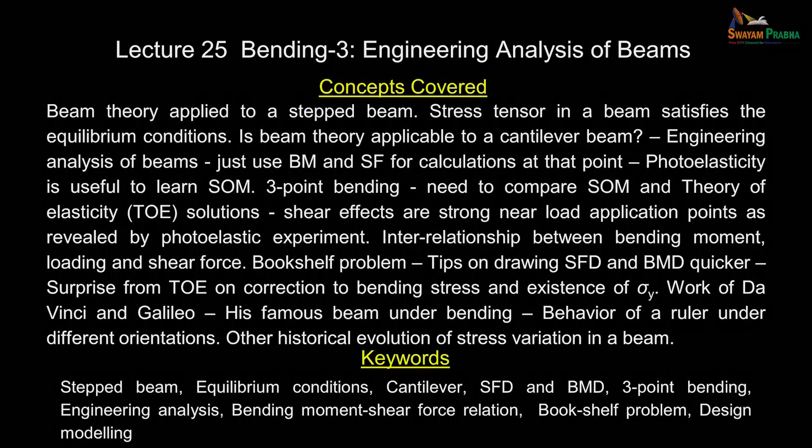Let us continue our discussion on bending of beams. We have developed the basic equations of strain and stress by considering the plane of symmetry. We have got the expression of strain as minus My by EIZZ, and sigma x equal to minus My by IZZ. On the plane of symmetry, we have applied the loading also, and we have got these expressions.

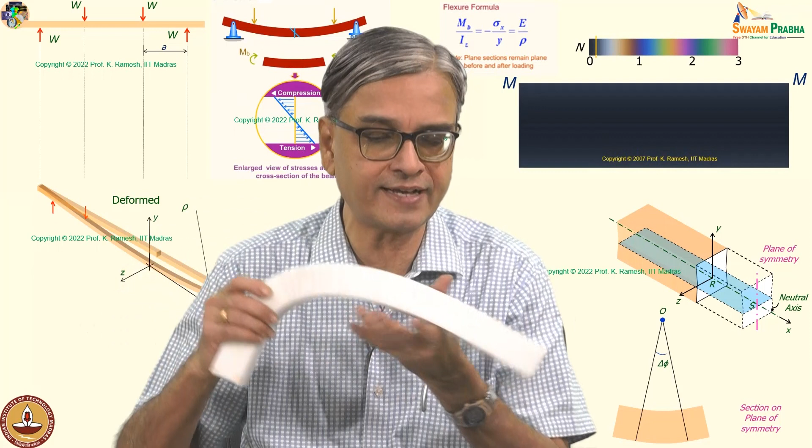We did not stop there. We took a counter example. Suppose I take a beam like this and then have large deformation. When I consider the thickness, what happens to the Poisson ratio effect? So we asked counter questions. When we developed the theory, in order to understand its limitation, we said...

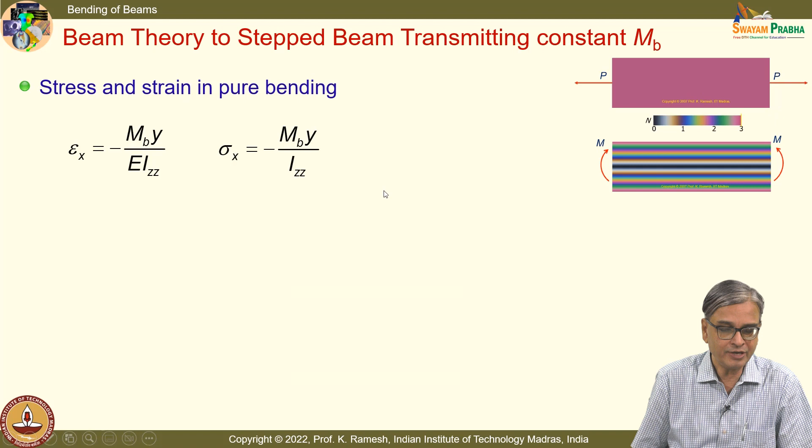Because of Poisson ratio, you have anticlastic curvature. Because we are working in small deformation, these equations are applicable. So we satisfied: the moment I go to large deformation, I should work with deformed configuration. We have not attempted to do that mathematics, but we satisfied when I have small deformation, my equations are reasonably good. And we have also got the flexure formula.

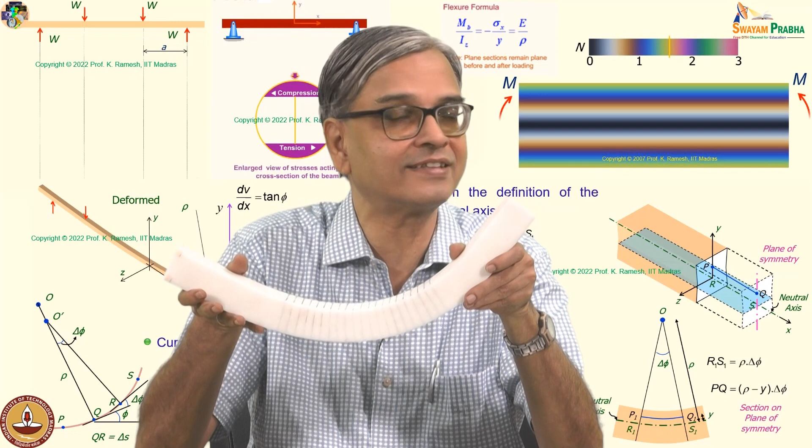I am not sure how many of you recognize: when I apply constant bending moment, the beam bends. These are like arc of a circle. Why? Because the bending moment is constant along the length. The bending moment is related to the curvature. So you have arc of a circle.

And when we looked at a slightly different problem where I have a step, because I said in engineering practice, you need to have a step so that you can locate the bearings. That's a simple modification I have made. But I have not done anything to the loading. The loading is still only pure bending moment. When I have only pure bending moment, I have a very interesting result away from this small zone.

Which is having this step, I find the fringes are horizontal, and I also have the black line forming at the center. If you have actually noticed the animation, you would have seen that black line was initially very broad and it was becoming sharper and sharper as we increase the bending moment. Like what we have seen in a beam of constant cross section subjected to pure bending, you see the same features even in a stepped beam.

And you also have the definition of neutral axis. In the neutral axis, when I have a triangular variation, the stress value is 0. Fine. Photoelasticity plot: sigma 1 minus sigma 2. Both sigma 1 and sigma 2 are 0. And you also have this neutral axis.

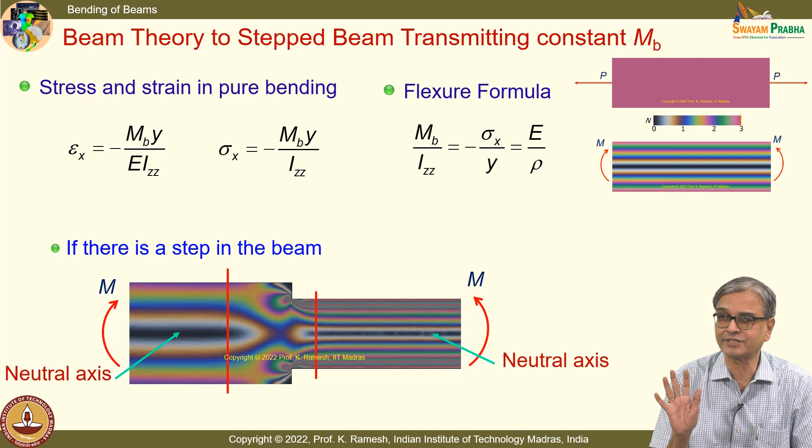And what you do is that in theory of elasticity. Even though I am not going to take theory of elasticity in all its completeness, we just look at what happens to this point A, and from your bending equation that sigma x is given as minus Mzy by IZZ. I said that you should cultivate the habit of looking at the stress component and putting that as a stress tensor. And what we have developed: differential equations defining the equilibrium of the solid.

We have not used it in this course till now. And whole of theory of elasticity utilizes these differential equations, solves this problem as a boundary value problem, and you get the solution which is exact, where you don't make assumptions about the deformation. You evaluate the deformation as part of your solution.

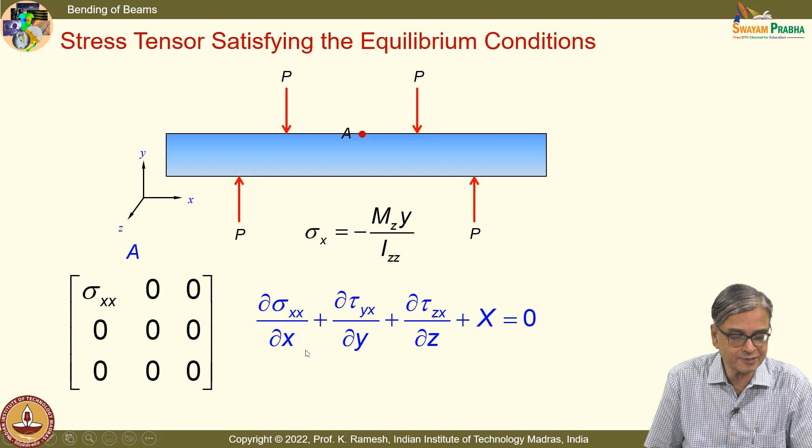And if you look at this, in the absence of body force, we have already said in strength of material that shear stresses do not exist because I apply only a pure bending. I have only sigma xx, and sigma xx is found to be a function of only y. So when I differentiate with respect to x, it goes to 0. It satisfies the equilibrium equation.

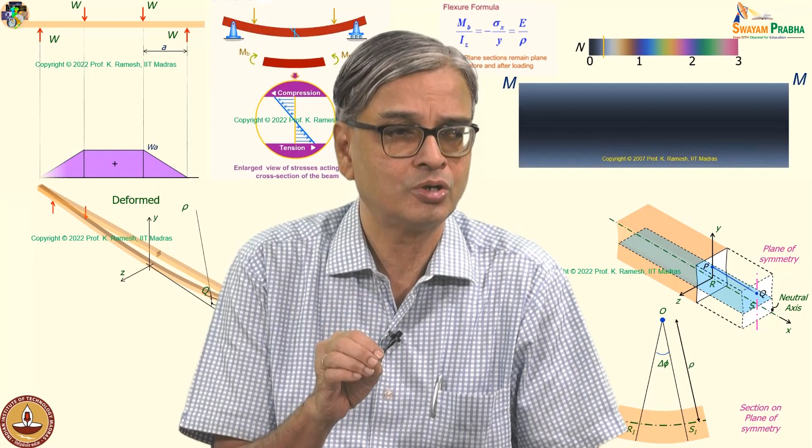Is the idea clear? So any problem that you do, you verify your solution with an experiment, whether it is an experiment based on a bending of a beam like this, or when you look at photoelastic fringes. If the experiments are carefully done, what you get in an experiment is truth. And your theoretical development should conform to that. If it is not conforming, then you must find out what is its limitation, what way we can improve.

So you should always keep track of that. Experiments are truth if they are performed carefully. If you don't do the experiment carefully, then there is no fun.

Now what I do is ask a question: can beam theory be extended to cantilever beam? I make only one small modification. In the earlier problem, we didn't have shear force. In this problem, I take a shear force which is constant on the length of the beam. Because it is constant, I find the bending moment varies along the length of the beam. It does not remain constant, it has a linear variation.

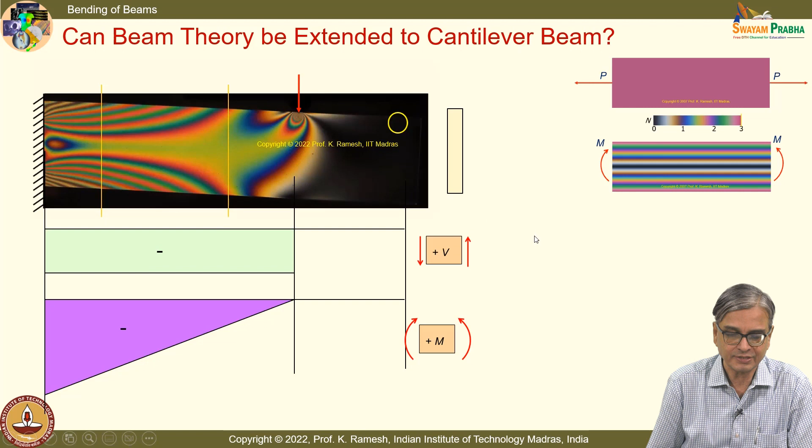Is the idea clear? Are you able to see? Now, what I have here is the bending moment varies linearly along the length of the beam. That means when I go from this point to this point, the bending moment is increasing. Suppose I say I can use the flexure formula, which I have it here, and then I put the bending moment corresponding to what I have in the bending moment diagram and evaluate the stresses.

The bending moment is varying linearly, and when I move along this direction, you would anticipate stresses also increase. If I have stress occurring here, the same value of stress occurs at a lower place because the bending moment is higher. Is the idea clear? That is happening.

The bending moment is varying linearly, but I find that this is not varying linearly, it has a curvature. The observation is correct. But you have one more difference.

I have a bending moment varying along the length of the beam. I also have shear stress. I have a new addition because of the way the beam is loaded. So I have to account for what way this shear stress is going to influence. The shear force is going to cause you shear stress.

And long back we have discussed, you have this as a free surface, this as a free surface. You can find out the distribution of shear stress variation from our strength of materials. Whatever the result I get, because it is a free surface here and free surface here, this should go to 0 at those points. That we have made clear.

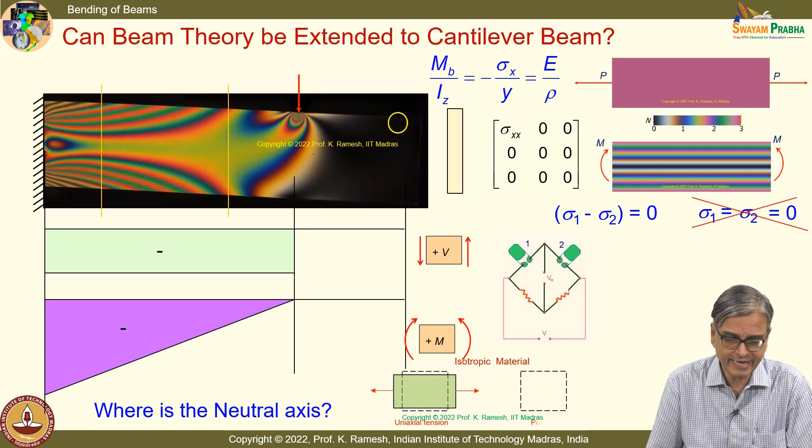So at this stage, what we say is you can extend it to analysis of a cantilever beam. The moment you say it transmits shear, I am going to get shear deformation, which will violate plane sections remain plane before and after loading. So I must call whatever analysis I do as engineering analysis of beams. Your exact analysis stops at pure bending. Anything other than that, even though we exploit those expressions, you need to carefully look at it as engineering analysis.

I was quite happy that you have done a beautiful set of experiments. This is what I said: when you do the experiment carefully, experiment is truth. If you don't do the experiment carefully, experiment is not truth. And in fact, whoever obtained this fringe pattern, I should compliment, because it's very difficult to handle this model in the polariscope and apply load with your hand. And when you do an experiment, you also anticipate results. No one does the experiment blindfolded. Before you do the experiment, you have a hypothesis. You want to see whether my experiment gives that hypothesis.

Because I have been repeatedly showing that you get constant color in the case of axial force, that has prompted you to adjust your loading so that you got constant color. The same experiment done by some other group, you didn't get constant color for the entire length. And you have also done 3-point bending. This needs a little more attention. We have to see whether my theory, my strength of material solution, is giving me the result in all its completeness. We will initiate the discussion.

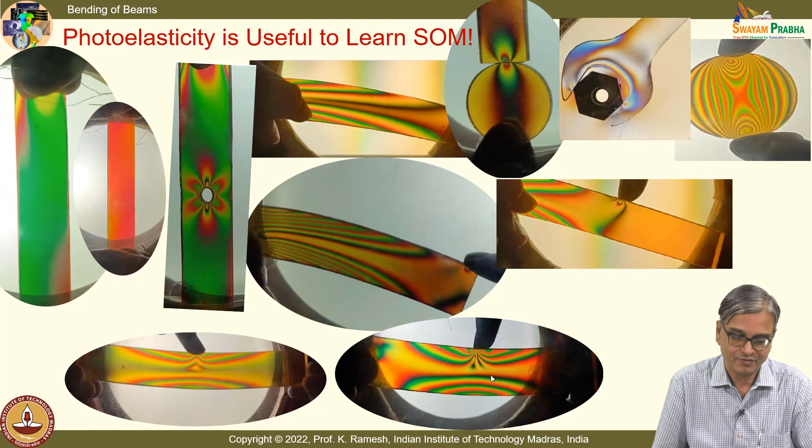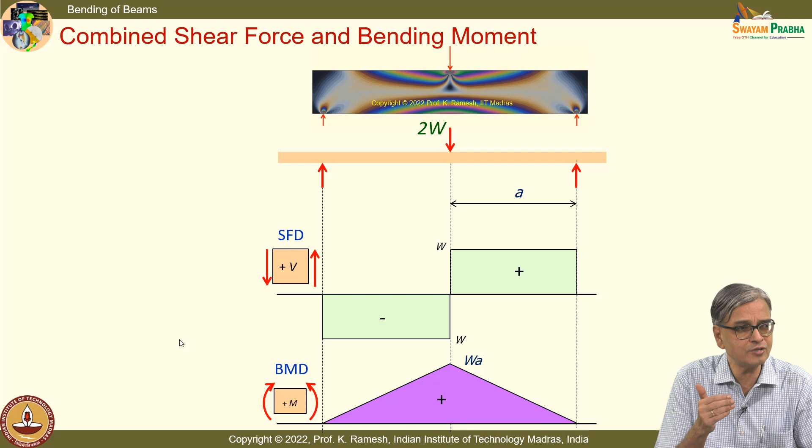You have to wait for shear force development to complete the discussion. And I have this as a 3-point bend, very similar to your cantilever, because when you look at it, the shear force is constant and your bending moment is varying linearly. So if I can apply my strength of material solution to a cantilever beam, I can also apply it to 3-point bending, because this shares the same feature on both sections.

I would like you to take a photograph of this, because these fringe patterns are very, very interesting. That needs to be looked at and discussed.

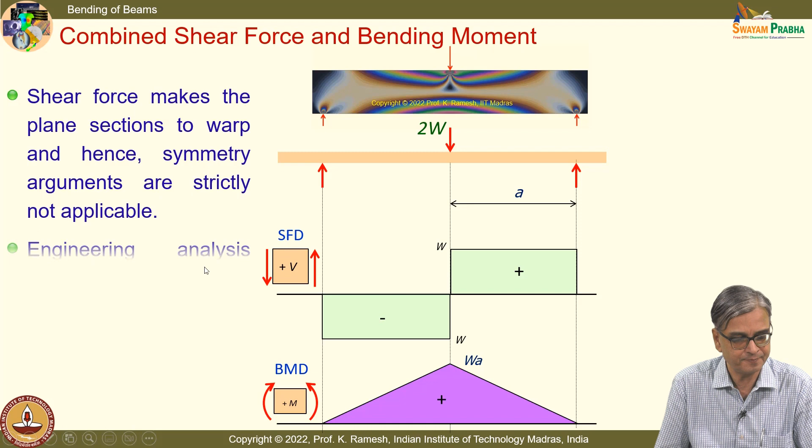The moment I have shear force introduced, it is going to warp the section, so symmetry arguments are strictly not applicable. I want to emphasize, we don't give up as engineers. We do the analysis, we recognize that we have made an approximation, and we label this as engineering analysis.

So the bending stress distribution is valid even when moment varies along the beam. Now we will have to investigate how this is influenced by the shear stress introduced. Look at whatever fringe pattern I have shown here.

They agree with theory of elasticity solution, and we have to investigate how they compare with strength of material solution. If I have to compare it with strength of material solution, I should also know how to calculate shear stress variation across the depth of the beam, which we have not done till now.

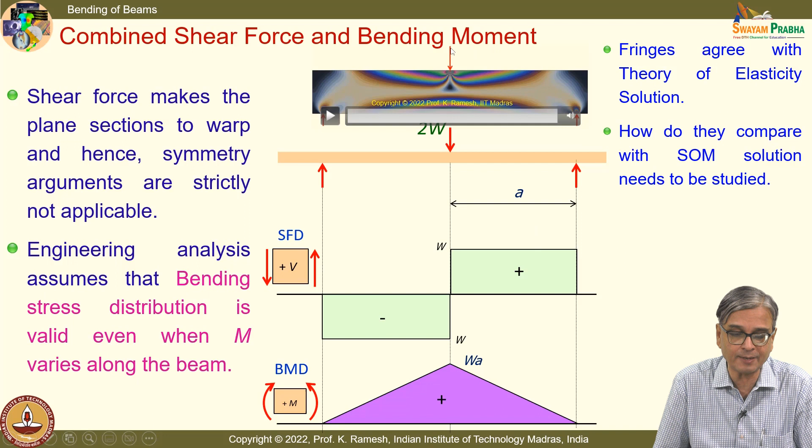We know only the bending stress distribution. At this stage, I want you to observe how the fringe patterns are. I also have a bigger blow up of the fringe patterns developed. What I want you to observe is, the bending moment is varying linearly across the length, it's increasing. We have seen that the fringe is having a curvature, and when you come closer to the load application point, this curvature has a sharp turn. Is the idea clear? Do you make that observation?

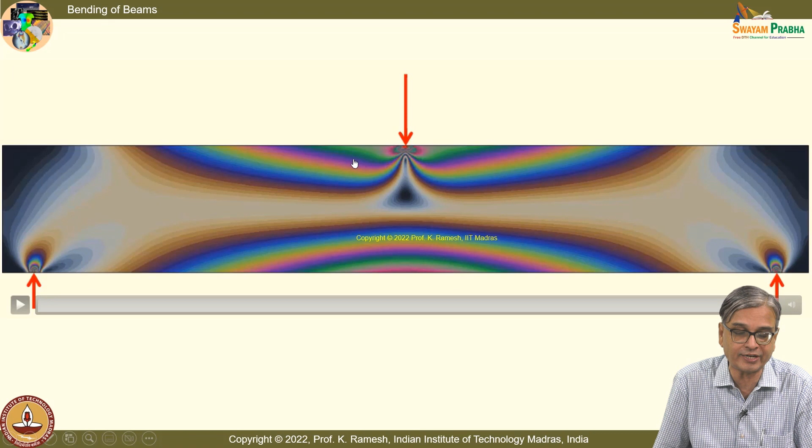We have to understand whether my strength of material solution, what we are going to develop in terms of shear stress, is good enough to capture these or not. You will have to wait, but have this observation in mind. When we develop the discussion, we will find out an answer.

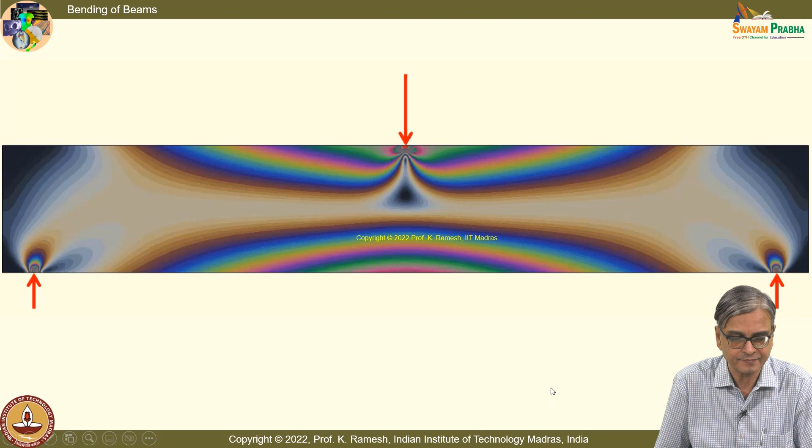The moment I introduce a shear stress, I am not going to have these sections remain plane, they get deformed. This is based on the final solution. You can make certain observations of this.

This line is perpendicular to this free surface. So when the deformed section is perpendicular, that means the original 90 degrees is preserved. What would you say about shear? Shear is 0. Shear is the change of the original right angle.

Is the idea clear? I have also made a conjecture that it is maximum at the center of the beam, and I have the maximum deviation from 90 degrees at the center zone. What I have is the plane sections have warped.

Where does this influence? That's question number 1. Question number 2 is, what is the variation of shear stress? Question number 3 is, what is its magnitude in comparison to bending stresses? All these aspects are important.

First answer is, as long as I am having a slender beam, meaning the depth is very small compared to its length, shear effects can be ignored. When the depth increases, you have a coupling between shear and axial. There, unless you bring in the shear effects, your beam theory solution is not complete.

You also have idealizations for that. Bringing in shear effects, you have what is known as Timoshenko beam. That's all postponed for your higher level of education. For this course, we will confine to strength of materials.

Shear stress variation over the depth of the beam is non-linear. We have always been looking in the case of twisting of a shaft, shear stress was varying linearly, and in the case of a beam, axial stress was varying linearly, and we find that shear stress variation is non-linear.

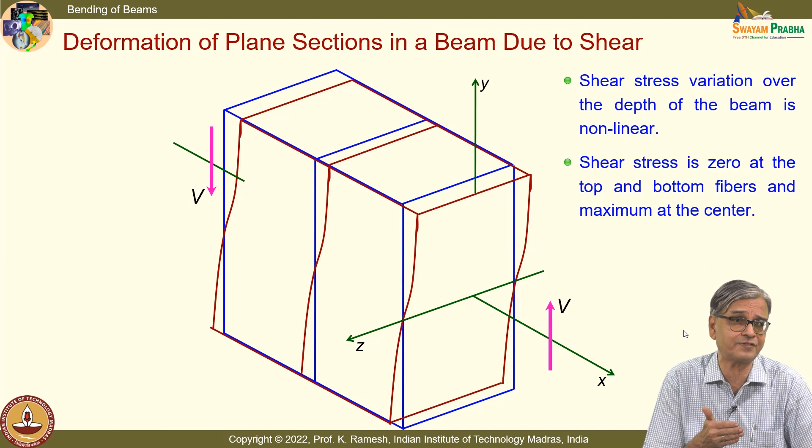As we have conjectured based on free surface argument, shear stress is 0 on the top surface as well as the bottom surface, and reaches a maximum at the center. That it reaches a maximum at the center, I gave evidence from photoelasticity fringes. It was no longer black, I have a color.

We'll also have to account for a loading that varies on the beam. One of the things you normally consider, particularly in civil engineering construction, is that self-weight itself is a load acting on the beam.

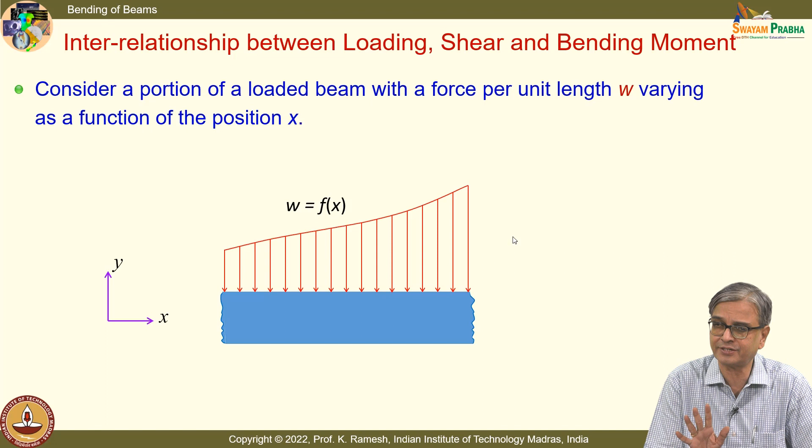This you have already developed in your earlier rigid body mechanics course, and this is how you verify whether you have drawn the bending moment and shear force diagrams correctly in comparison to the loading diagram. It's only a recapitulation, not a new derivation, with the symbol for how we label positive shear stress and positive bending moment. That's the only difference; otherwise this you have already done earlier.

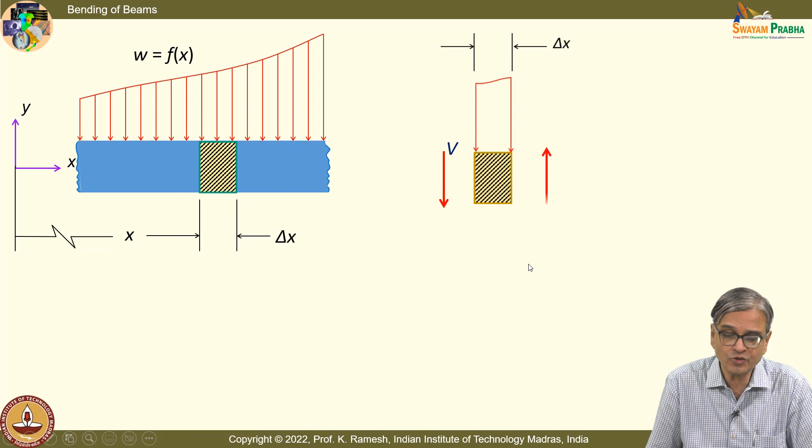So I take a small section and write all the quantities I know. I recognize this has a finite length of delta x, so I anticipate there is a variation of shear and bending moment along the axis, and we take a positive direction of shear as positive. The only difference is we've learnt it with a different sign convention symbolism. Otherwise, you have already been taught how to get this.

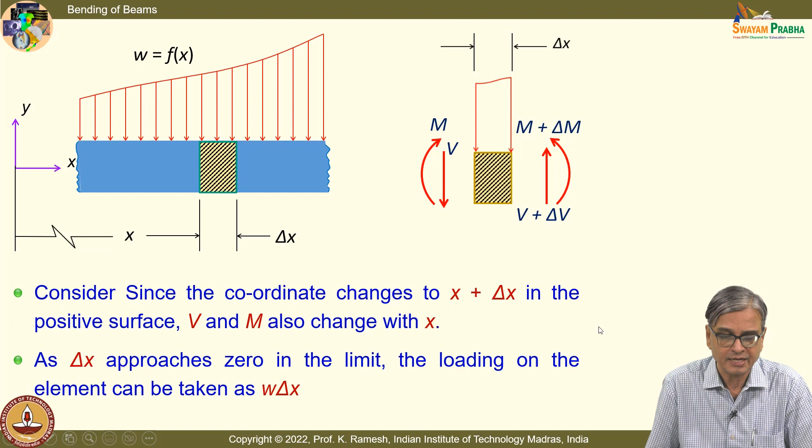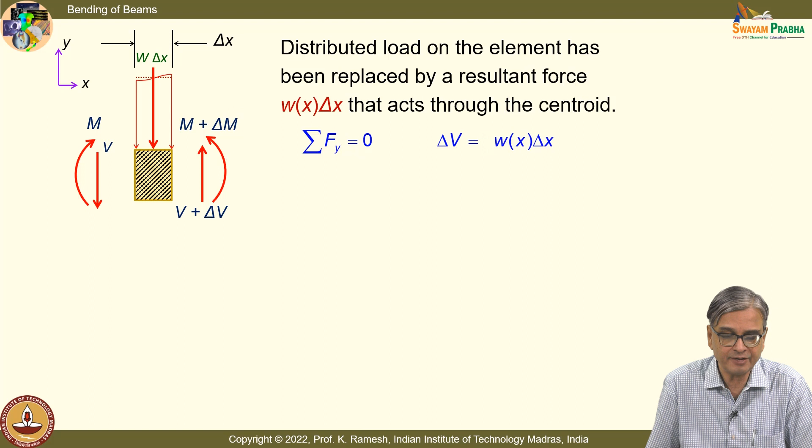In a short distance delta x, I can put the value as w into delta x, and replace this as a force. I write the force balance and get the interrelationship. So doing sigma Fy equals 0, in the limit delta x tends to 0, I get dV by dx equal to W, the intensity of loading.

When I do the same thing for moment equilibrium, I get another interesting result: dM by dx equal to minus V. If you had used the opposite sign convention, you would have got dM by dx equal to V; that's where the difference comes. What this says is, if I know the shear force diagram, I can comment on the slope of the bending moment diagram. That is one way you verify your plotting.

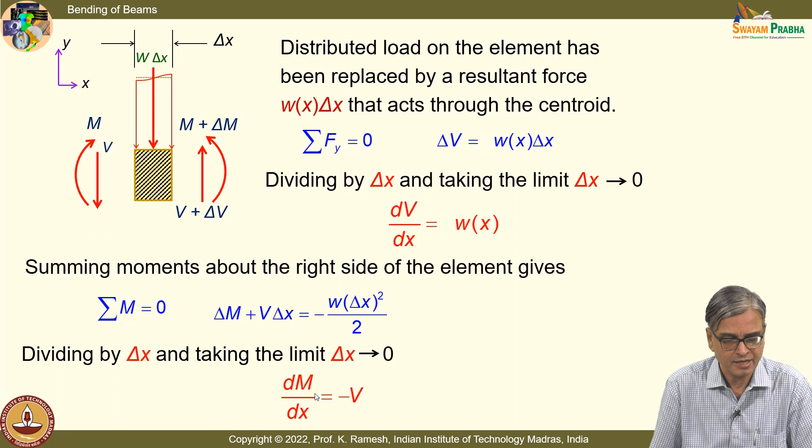Hand plotting, you have to do all that. If you have an equation, put it in your software and want to plot, the software will faithfully fit the curve. But when you do hand plotting, you have to know how to do it.

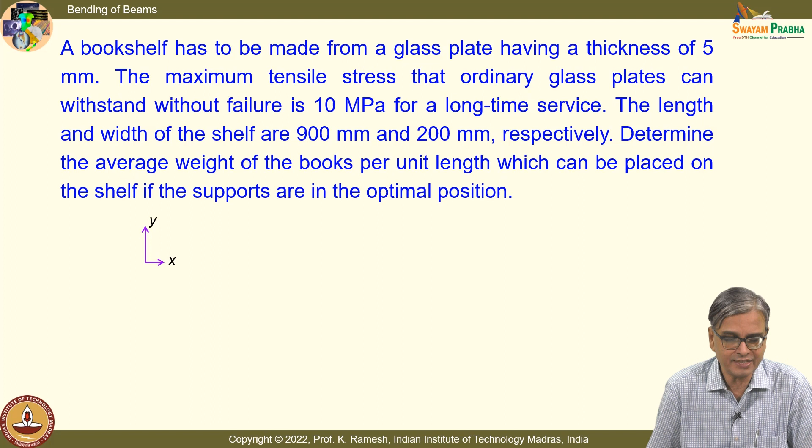Let us solve one very down to earth simple problem. At the same time, it's very interesting, and it also has components of modeling. I consciously want to bring this in - you become better engineers only when you know how to do modeling.

First, the modeling: when you have a stack of books, none of them will have the same weight or size, unless you buy an encyclopedic volume from one publisher where all 10 are the same size and weight. But if you buy books in fluid mechanics, solid mechanics, material science, all of them will be different. So the first idealization you have to make is to translate this into a uniform loading - you should not exceed that. That's what I want you to recognize.

What is given is you can make a nice, elegant support using a simple glass plate, of length 900 millimeter and width 200 millimeter, which can accommodate many of your books. It also says: determine the average weight of the books per unit length which can be placed on the shelf if the supports are in the optimal position. You have to understand what an optimal position is - in fact there is an embedded clue in the question itself.

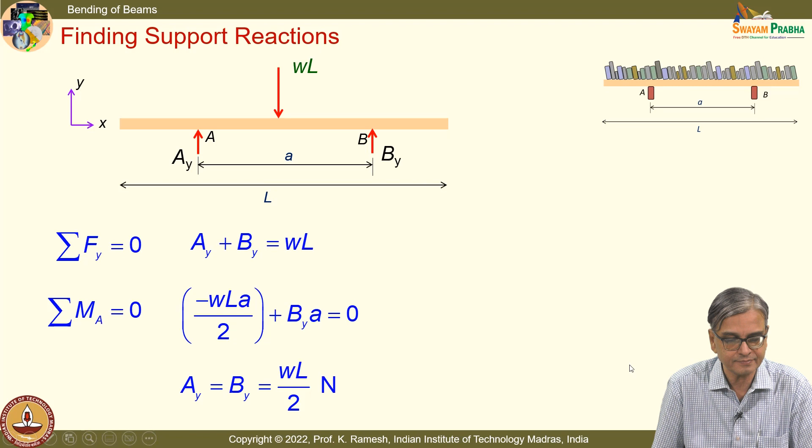I have also asked you to do this as your tutorial - to get the shear force and bending moment diagram - so that I can go and handle those portions a little faster. First, you have to get the reactions, using sigma Fy equals 0 and Ma equals 0; it's very straightforward. So I get the reactions as WL by 2 at both supports. I've also been saying that for a problem like this, you should be able to draw the bending moment and shear force diagram quickly.

So if you give me this, I will find the shear force at this point, and the shear force at this point - that is good enough for me to draw the complete shear force diagram. And for the bending moment, I'll also find what is happening at the center. So two points are sufficient for the shear force, and three points are sufficient for me to draw the bending moment.

Because the loading is W Newton per meter, I anticipate my shear force for the entire length of the beam to be a first degree curve, because I know dV by dx equals W. I use that. And when I go to bending moment, I have dm by dx equal to minus V. So if the shear force is a linear curve, bending moment will be a parabolic curve. So all that information you use it.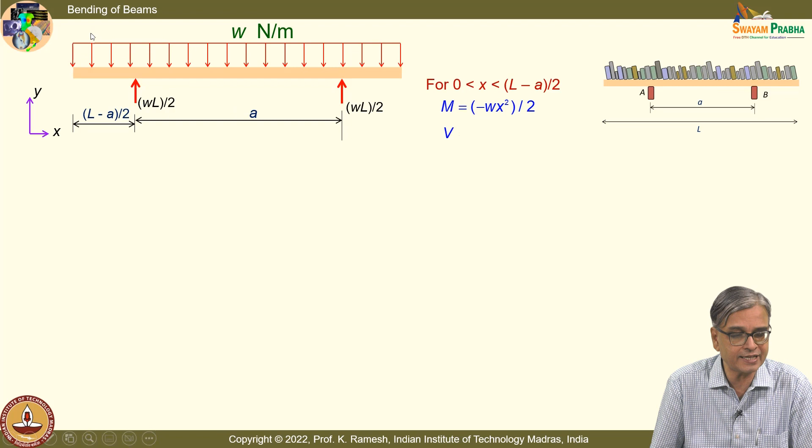If you do it from the conventional point of view, I can find out what is the expression for m. If I take a section and then do it, I can do this. So I will do that for one section, another section, and the third section. That is for completeness. So for completeness, you have these expressions. I can get it for this.

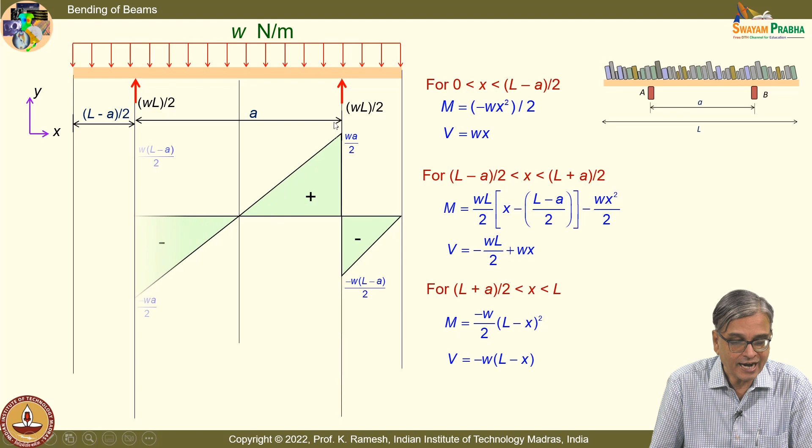When I want to plot, at the start the shear force is 0 as well as bending moment is 0, so I know 2 points already to start with. At this support I have WL by 2. Actually, from this point, I will go up by WL by 2 — that's what the mathematics also will give. I'll go up by WL by 2, and since I know this is a straight line, I'll join these two points. Again go up by WL by 2, and then come back to 0. So you can draw this very quickly.

You have to build up that acumen. As you learn the course, you can't be saying that you will take half an hour to solve this problem.

And similarly, when I go for the bending moment, I know that this is a second degree curve. The question is whether I should draw it like this or like this. You look at that based on your slope. See, slope is 0 here, slope is positive here. You have dm by dx equal to minus V. When V is 0, slope is also 0. When V is more and more negative, slope is also more and more positive. So that is how you decide why I have to plot the curve like this.

Now you can quickly say, as an engineer, suppose I put the support at the end, what would be my bending moment diagram? The bending moment diagram will be a parabola from this end to this, and your bending moment peak value will be much higher than this — do you see that difference? So one clue you get is, by adjusting the support, you can achieve a situation where you can minimize the level of maximum bending moment occurring in the plate. So that is a design tool.

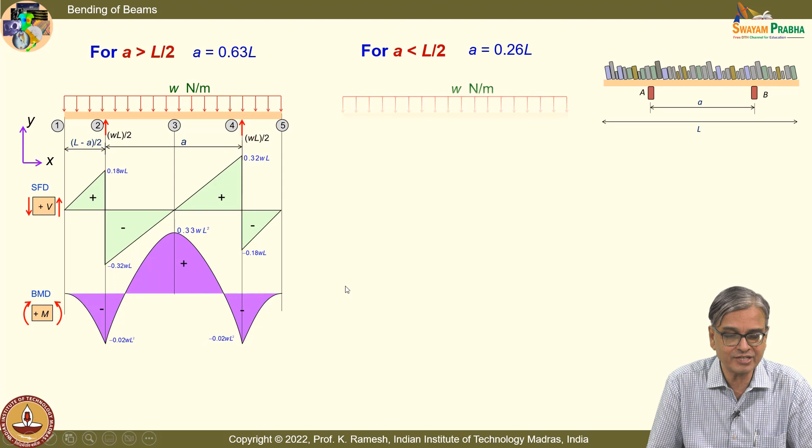And with this itself, you can find out, by equating these two, the optimal position. In order to aid your thinking better, I am also plotting this for when A is greater than L by 2 and when A is less than L by 2. Greater than L by 2 is what we have got earlier also — when you substitute the numbers are easy to recognize, and then see how they vary. And when A is less than L by 2, I have everything on one side.

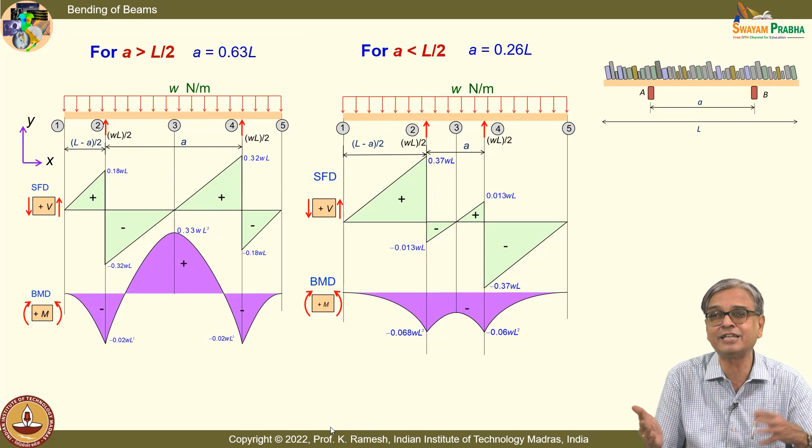If I start from this, I will not be able to find out the optimal position at all. Only if I start from this kind of a bending moment diagram do I have an opportunity to find out the positive bending moment and negative bending moment and equate the two. So it's a design scenario. What we do is simply equate the two, equate the magnitudes.

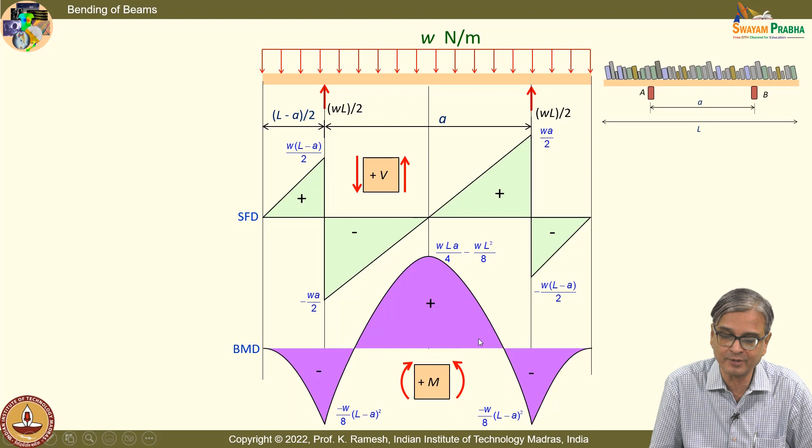The same shear force and bending moment diagram is replotted. I equate these two values and get a quadratic expression: a squared minus 4al plus 2l squared equals 0. From this, I can solve for the value of a.

That means I have adjusted my supports such that whatever bending moment I get here, I ensure that this peak and this peak are of the same magnitude. That's the best optimization you can do for the given problem.

When I substitute, being a quadratic expression, I get two roots. You have to select the root which is appropriate—only one will lie within the beam. So I have this as 527.21 millimeter.

Once you substitute here and apply the beam theory, hopefully the beam theory is applicable. We have to verify with theory of elasticity—we have not done that verification yet. We will also do the verification, and if the deviation is small, keep our eyes half closed, pat our back—I have got the value which is good enough for my design. This is how engineers operate.

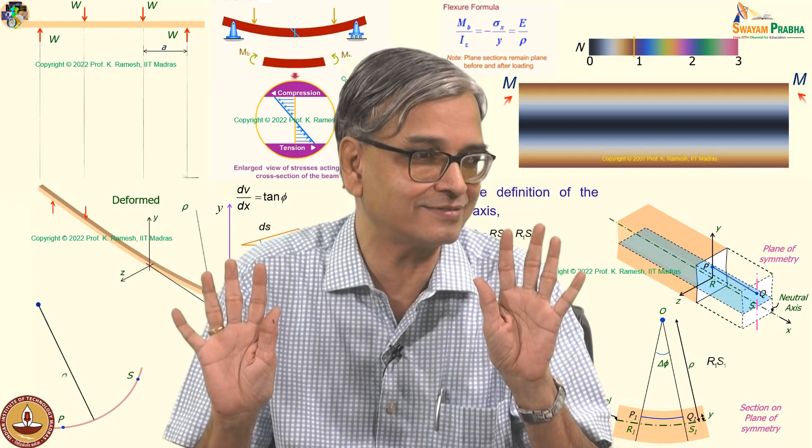You have to get the core of the problem—that is more important. The core of the problem here is that bending stress varies linearly over the depth of the beam, whereas when I apply an axial load, it is constant.

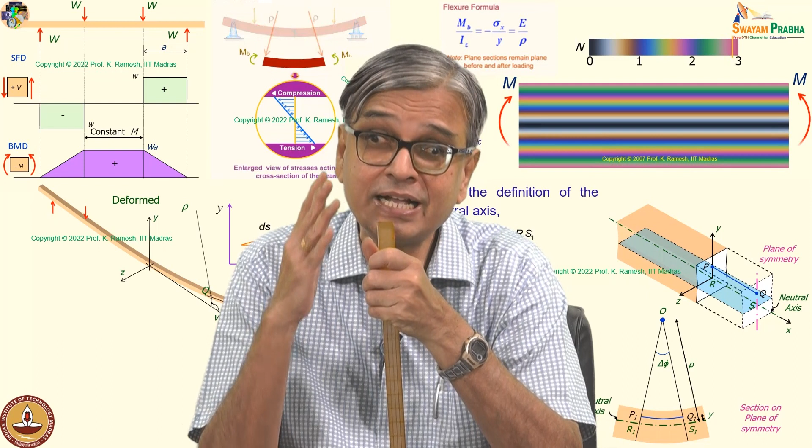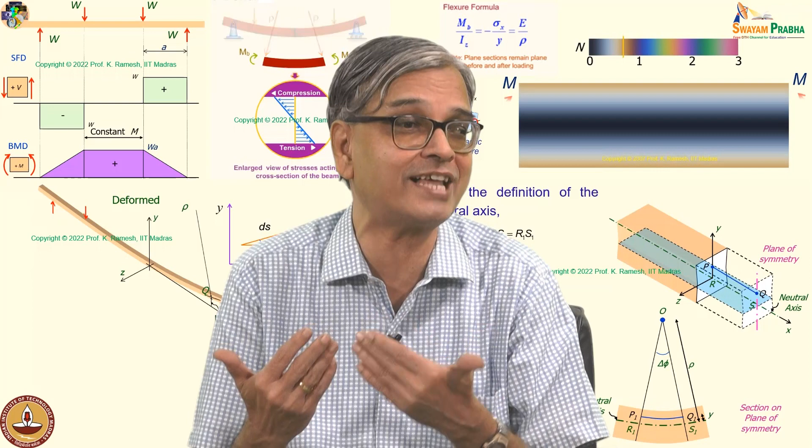To recognize that it varies linearly was the biggest challenge the scientific community faced—it took 400 years. You should recognize that. We will also revisit the history today, because now you are more equipped with beam theory, you can go back and appreciate what aspects they could reveal and what they could not find out in their development.

So I have this bending moment equated, and you get this expression. When I substitute the value of a which I calculated, I get the maximum bending moment magnitude is like this. And I have the bending equation available.

Whenever you solve a problem in bending, please write this in one corner and start, because you are going to exploit this equation. So I can write sigma bending max as M max divided by Izz into y, and then you have the cross section like this, with breadth and height. So for this rectangular cross section, here's how to calculate the moment of inertia.

When I use the information given in the problem that it cannot exceed 10 MPa, I find out the value of W. I have this as 0.48 Newton per millimeter.

Let me ask you a few more questions. I am not going to give you the answer—I want you to think. Suppose I want my W to be not 0.48, I want this to be doubled. What are the options that I have for me to do?

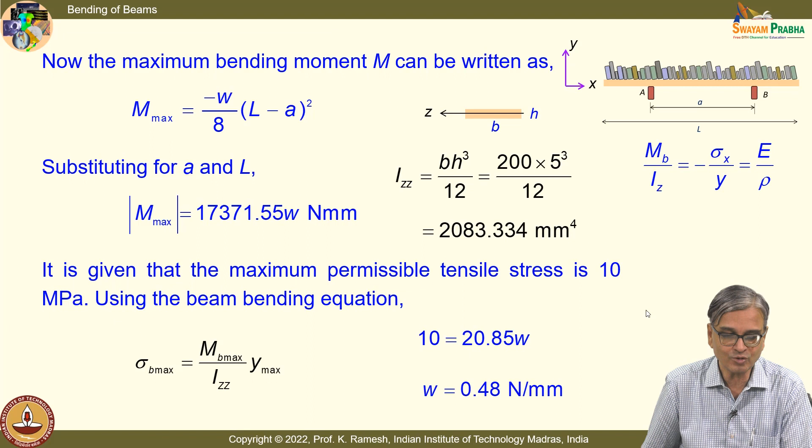Now let us look at whether this is supported completely by theory of elasticity. There are surprises. You have also calculated the shear stress, and you can take it that this is varying parabolically. I said non-linear, anything other than linear we'll call non-linear. It may even be a simple second degree curve. And we have obtained from strength of materials that bending stress varies linearly.

Please make a sketch. This you will not find in any books that you have access to. Also appreciate that stress magnitudes are not to scale, that's very important, since we are only discussing the variation over the depth of the beam. You will find that what we get from strength of materials up to this point is perfectly correct.

We have also done discussion on free surface. Suppose I want to do the discussion on what happens at this surface. Is this surface free? I am deliberately applying a vertical load. How can that be free?

In the development of bending of a beam with constant bending moment, we have idealized sigma y as 0. But this is one of the most common loadings that you have, and you are definitely applying sigma y. You are applying a force to generate sigma y. So when I go and solve the problem as a boundary value problem, taking the differential equations, I am definitely going to have sigma y, and it will die down to 0 at the other edge.

And there is also another surprise. Even the linear variation of bending stress is no longer supported by theory of elasticity. You have a correction term to sigma x.

So you have two additional quantities: sigma y exists, and I have not drawn these to scale. You will find that these are second order effects. The small variation can be ignored when you use the expression for bending stress which were developed in strength of materials.

Is the idea clear? So you have to understand that we are doing only engineering analysis, so you have to appreciate the limitation. I have raised a point in a 3-point bending: there is something we have to discuss about the shear stress, whether strength of materials predicts it correctly or not. You have to wait until we develop what we do in strength of materials, then compare it with theory of elasticity. So you should appreciate that whatever expression we have got in strength of materials is very useful, but it has its own limitations. Appreciate the limitations.

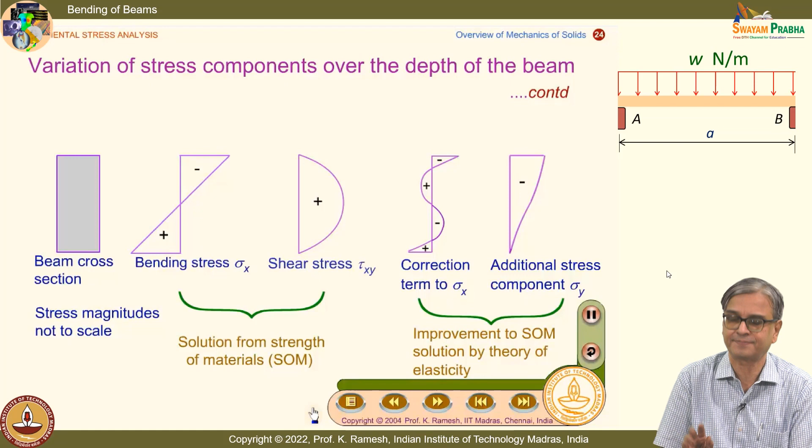Let us go back and quickly go through the history, because we have already seen this. You can appreciate certain aspects now better.

Leonardo da Vinci was the first one. He established all the essential features of the strain distribution while pondering the deformation of springs. That is his wisdom, we have to say. For the specific case of rectangular cross-section, Da Vinci argued equal tensile and compressive strains at the outer fibers. That's what we also say now in strength of materials. He could also say that there exists a neutral surface and a linear strain distribution.

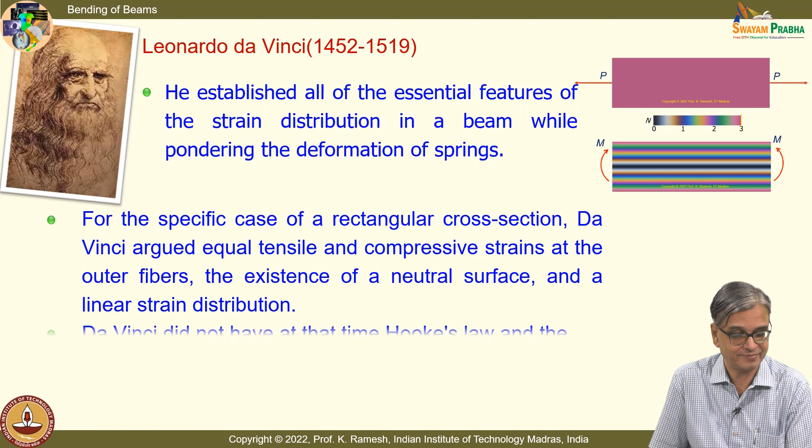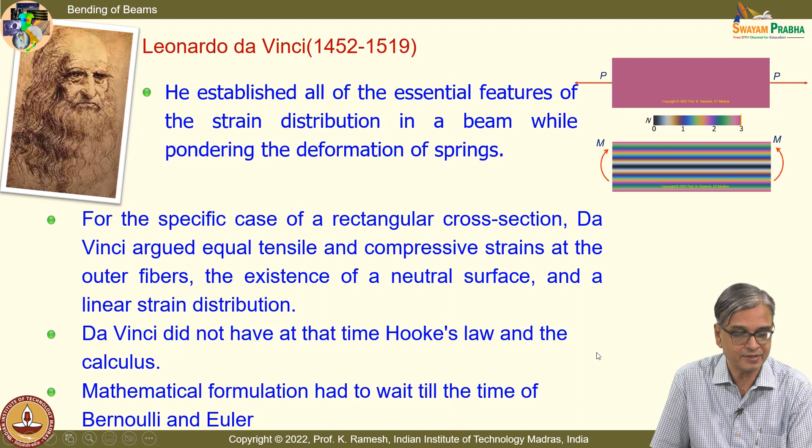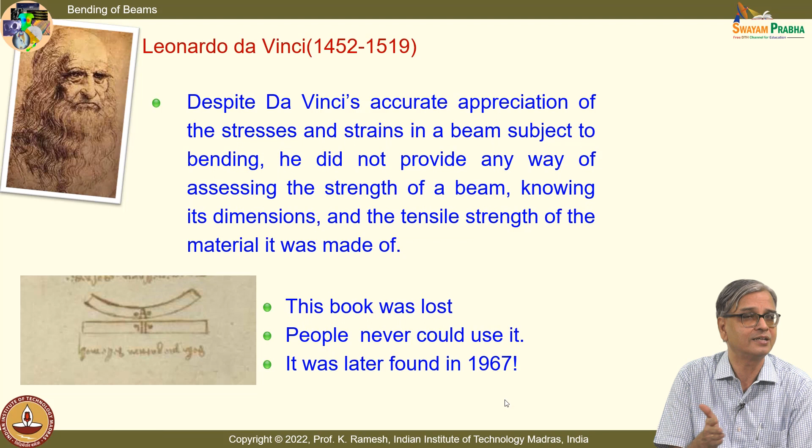What he could not achieve: he did not have Hooke's law, so he could not translate this understanding to stresses. And he had to wait for the mathematical formulation of Bernoulli and Euler. He was also not in a position to give recommendation on how to design a beam, how, if I know the strength of the material, to get the dimensions of the beam. When you dig the history, you find that he had written a book with all this information, but this was found out only in 1967. So all the early researchers, without his book, had to struggle and find out what is the beam theory.

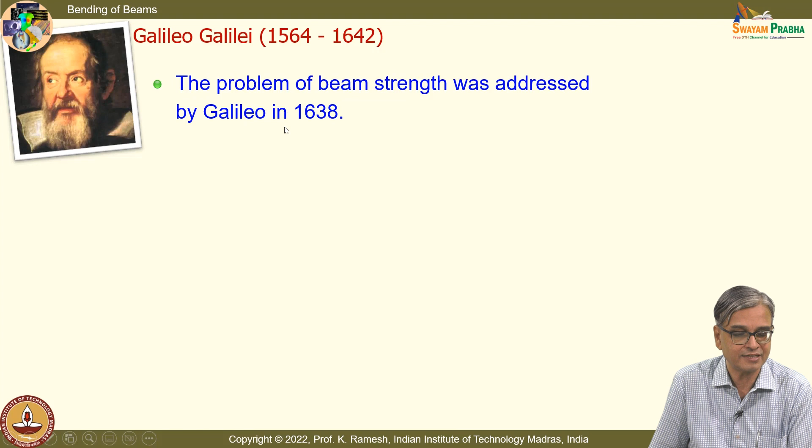So Galileo was the first person. He said the beam strength was addressed, and he was able to give some numbers based on his experiment. Even at that time, this was a very difficult experiment.

Can you recognize he made a statement: a ruler offers more resistance when lying on the edge than when lying flat. Do you agree with this observation or differ? You nod your head, but what do I make out of it? Do you agree or not? You agree. Can you tell me how you say that this is better than that? What is the aspect that you can say mathematically? Very good, I'm happy. So, bending rigidity, EIZZ, and you know very well IZZ for this cross section is very high compared to this.

So this observation was correct. They were learning experiential knowledge, it was very good. I have been using this beam, this is also made of plastic. This has some cross section, and this has cross section which is much larger. And you know very well that this has hardly any bending rigidity. I needed this to show you

warping in case of twisting, and also for anti-clastic curvature. So what made the difference between the two? This has more rigidity than this because of its moment of inertia. So EIZZ is a very important aspect when you are looking at anything to do with bending. Similarly, GIP for torsion.

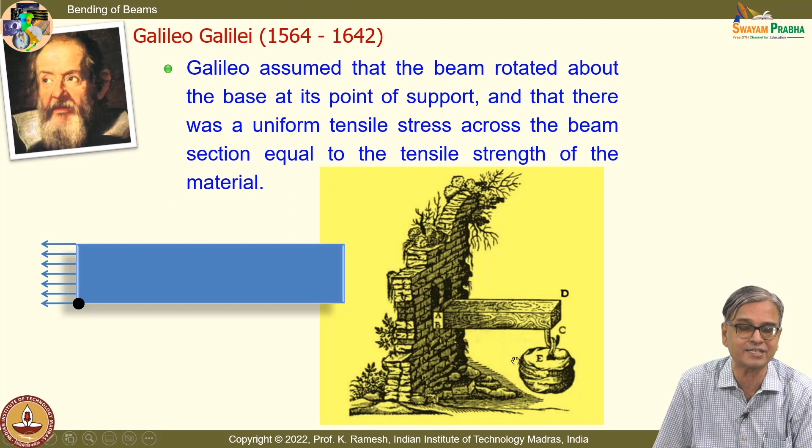And he had a good idea of how the beam failed and things like that. He could not find out the variation of stress, that was very difficult. He had some idea that this failed here. It said it's because they were accustomed to only axial force transmitted, so the same idea of equal force was

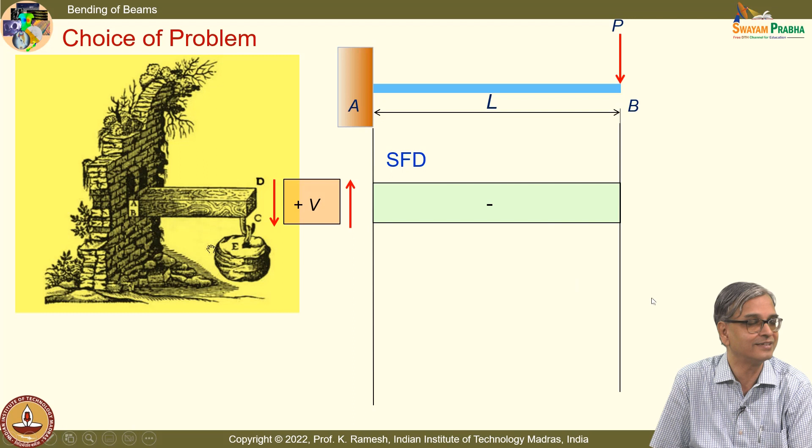obscuring their thinking. Now you can say that he had taken a complex problem, because I explained how your cantilever beam is difficult to handle, since it has shear force, and shear force introduces plane sections that do not remain plane, and bending moment varying. We were very clever, we took a problem deliberately that would transmit only constant bending moment. He didn't have that luxury, so he didn't have that luxury, that is why he faltered. He could not proceed beyond a particular point.

And you also see that this beam is not slender. The problem is complex because it is not a slender beam. The depth is important. I said the shear and the bending moment, the coupling takes place when these two, the depth is comparable to the length. And the material, he was not having isotropic material, he was having wood. So they could not proceed. So when you want to solve a problem, you should know how to simplify and get the core of it.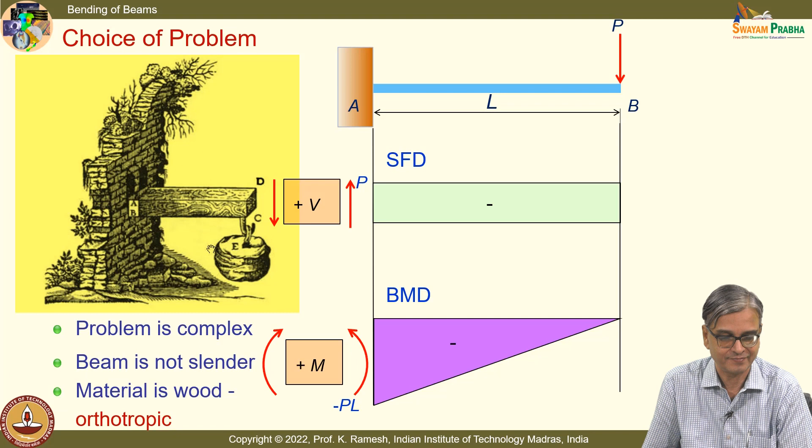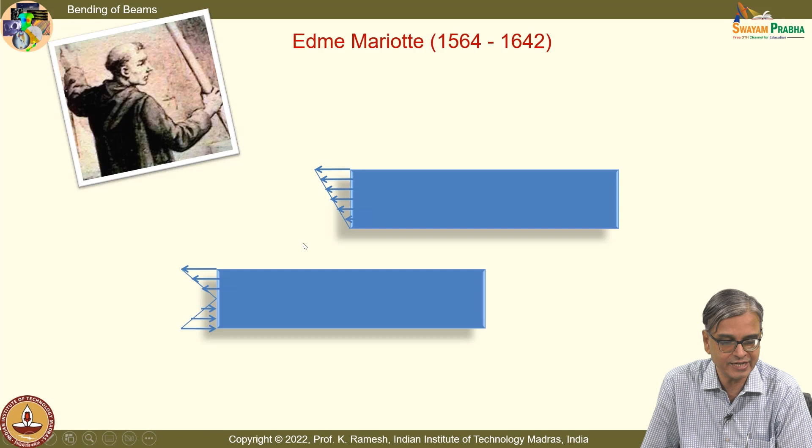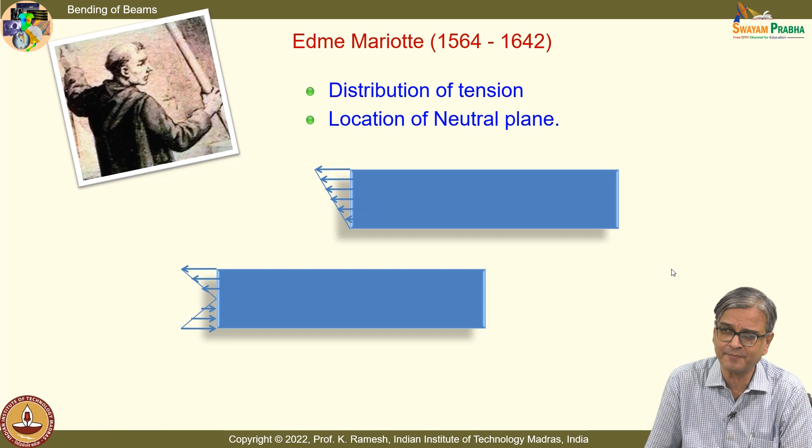And Mariotte had some idea that the variation is linear. He was also not able to succeed, but he showed both variation like this as well as variation like this. But it's not clear why he obtained two of them. So they were very close to the solution but did not achieve it.

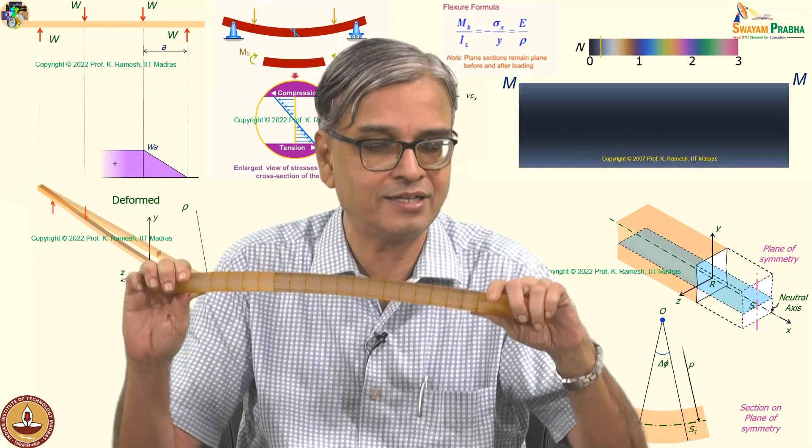He could also say the neutral plane. And Parent, he got this as triangular, and he had this neutral axis shifted, and stress distribution from tensile at the top face to compression at the bottom. They were always looking at bending like this, like what I was showing. So the top surface is in tensile and bottom surface is in compression. So he was able to do it, and the triangular variation is credited to Antoine Parent.

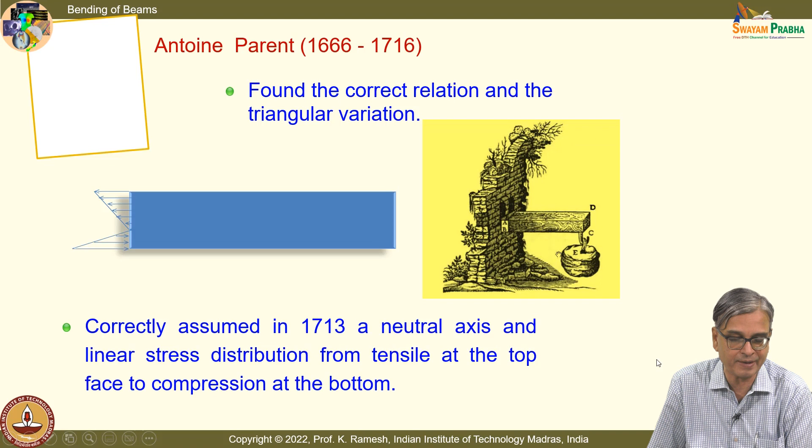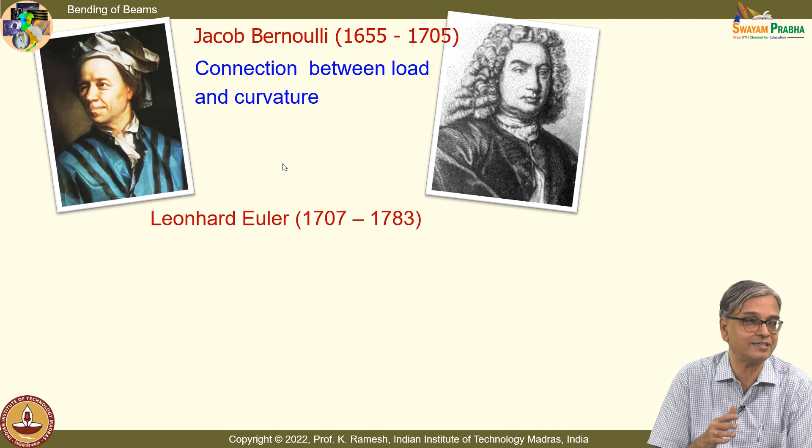The breakthrough came only with Euler and Bernoulli. They linked load and curvature. Unless they could bring in the deformation, the beam problem was not solved. That took such a long time to develop. He was a Swiss mathematician, the other a Swiss mathematician. They independently derived beam bending formulae and are credited with development of beam theory in 1750.

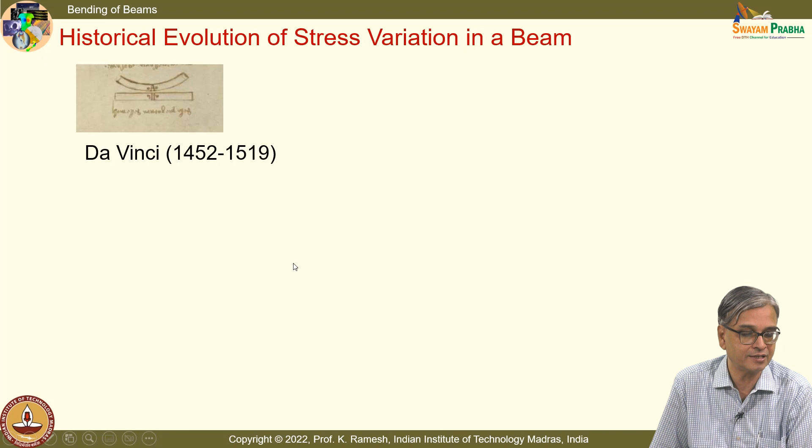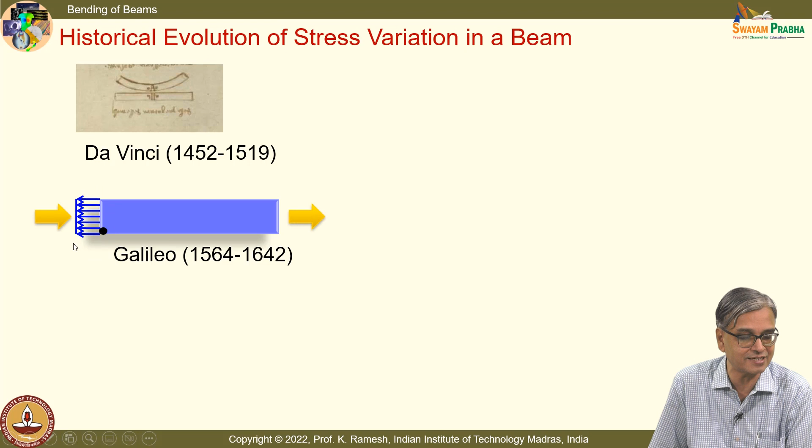But the actual distribution was credited to Coulomb. And if you look at the distribution, the contribution by various scientists, we summarize: Da Vinci had all the idea, but his book got lost. Galileo could design beams, could solve the problem halfway, but he assumed that the stress is uniformly distributed. And you have the first appearance that it is varying in a triangular fashion in one form. He also had mentioned this, without assigning reasons.

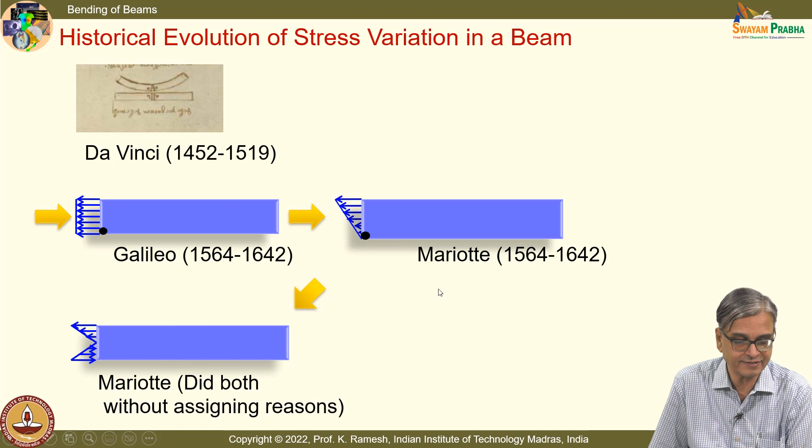And Parent correctly said that you only have this kind of variation, his neutral axis is shifted. And finally, you have Coulomb, who has solved the problem of beam bending. So what you have learned in the few lectures has taken 400 years for its evolution. It's not something simple. So if you have doubts, don't feel annoyed. Great minds have had these doubts, and they didn't have access to simplified experimentation.

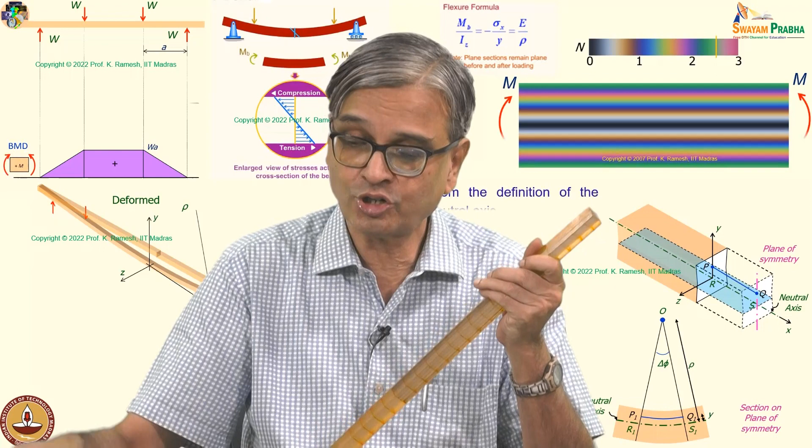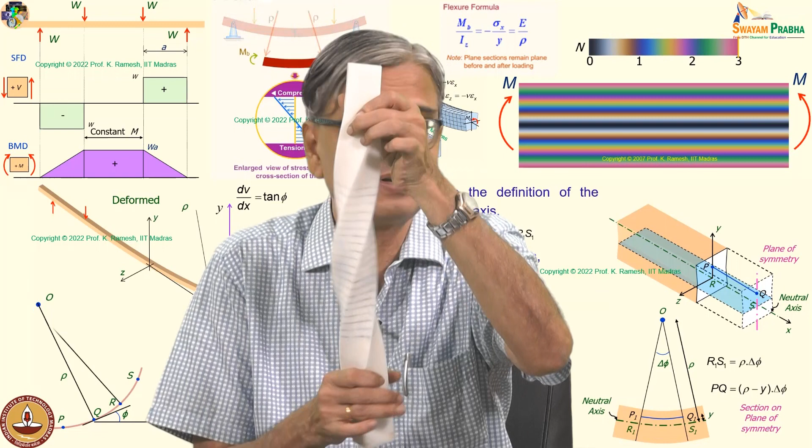And in fact, even in IIT, this I could get easily in a commercial shop. And in order to show you warping and torsion, I had to get a material which is very soft. We had to take some effort to get this material done. So in this class, we have looked at what are the limitations of strength of materials approach to beam theory. We said it is derived only for a beam transmitting constant bending moment. Anything other than that can be considered only as a good approximation of engineering analysis.